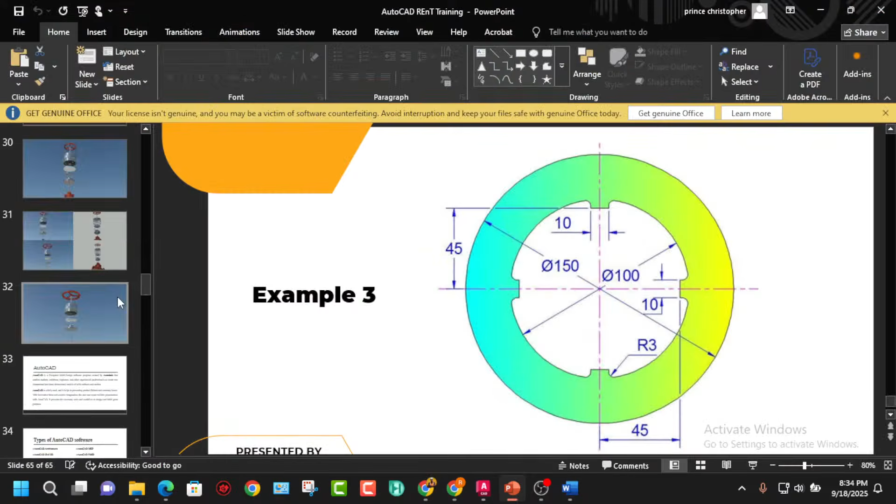Okay, I'll dive into AutoCAD and do some recap. I'm not going to start from the beginning. We talked about what AutoCAD is, and we looked at what AutoCAD is.

It's a computer aided design software designed by Autodesk that enables drafters, architects, engineers, and other experienced professionals to create two-dimensional and three-dimensional models. When you are working with 3D, it's called 3D modeling. When you are working with 2D, it's called drafting.

We looked at professions that use AutoCAD, and we also looked at different types or variations of AutoCAD software. We looked at career as a CAD designer, and all these are careers as a CAD designer. We talked about how architects can maximize the use of AutoCAD, as well as mechanical engineers and product designers.

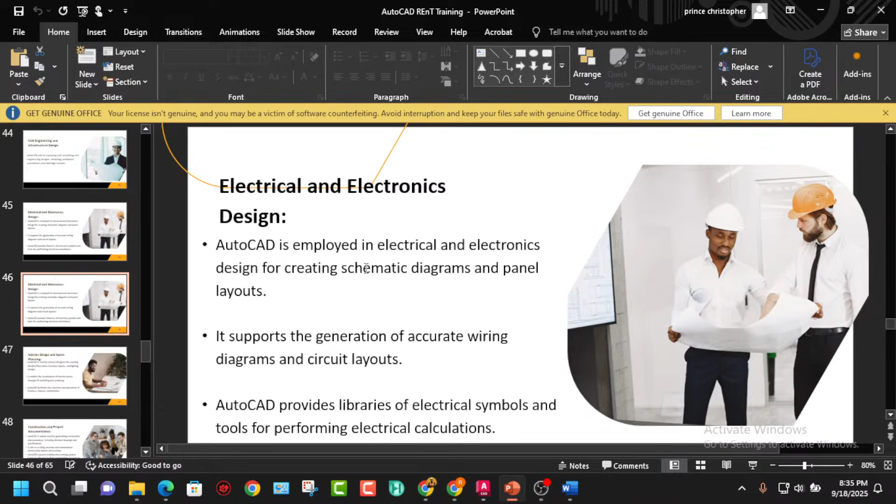We looked at civil engineers also, electrical and electronics engineers — they also use AutoCAD. We also have interior designers.

There was this brief introduction to the AutoCAD workspace, and we familiarized ourselves with the AutoCAD workspace, the ribbon, the user coordinate system, and the command line. We also have the view cube, the ribbons, and all of that.

In the first class, we looked at line, polyline, circle, rectangle, polygon, and arc. We didn't treat arc, and we haven't also treated hatch. During our first class, we looked at the major difference between the polyline tool and others.

We also looked at the circle tool, noting there are different ways of drawing a circle. You can either use radius or diameter. That means you click on the circle tool, specify the center point, and then specify either the radius or the diameter of the circle.

We looked at the rectangle tool also, how to create a freehand rectangle and also a rectangle with dimension. We looked at polygon, how to create an inscribed polygon and how to create a circumscribed polygon.

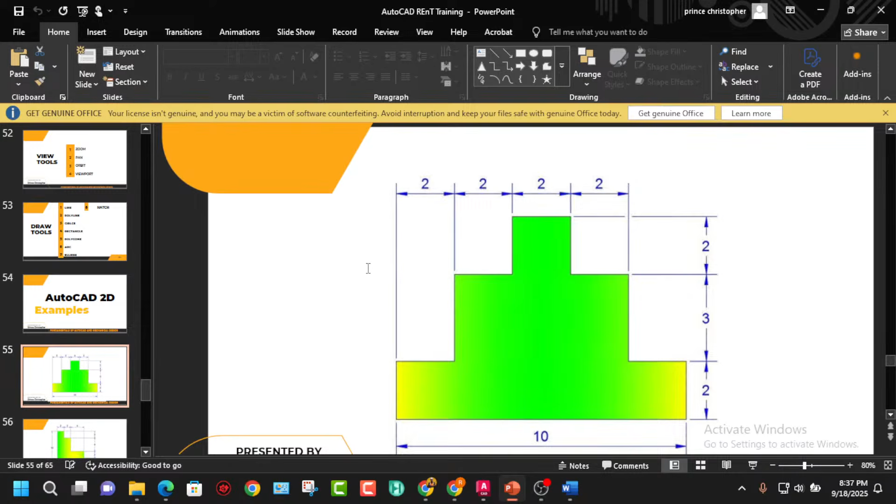Some of you here have used AutoCAD before, so this is not the first time, but I believe you all learned something from the previous class. We took an example — this was the first example we did, using the line tool and the basic procedures of carrying out a 2D drawing. These were examples or assignments that we were given.

Then we also did this using the coordinate system, which I'm going to do a little recap on before we move forward. Before I start, I would like to ask if anyone has any question from the previous class — if you have any question, please drop it in the chat box.

I'm going to take this tutorial again, or this exercise again, using AutoCAD, how to do coordinates, how to draw a 2D object using the coordinate system in AutoCAD.

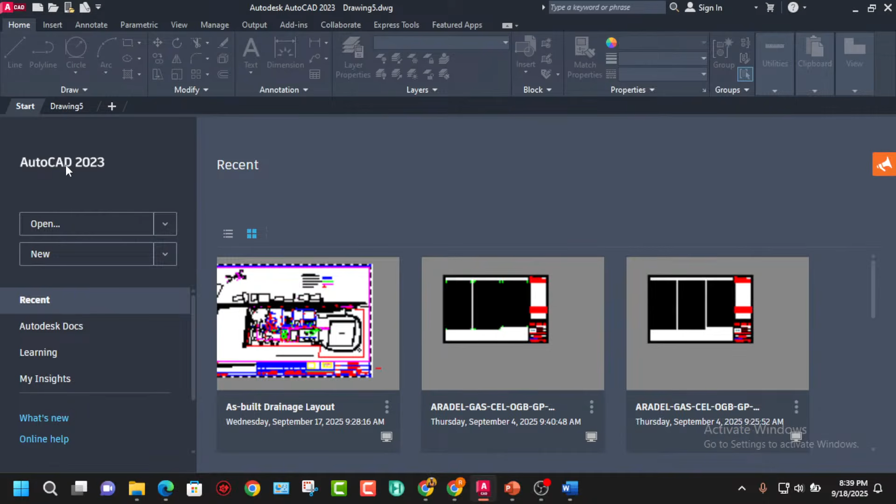Like I said in the first class, this is your AutoCAD working environment. This is the welcome screen or start screen. I'm using AutoCAD 2023. Below we have Open, to open a previous drawing, and New, to create a new file. I'm going to click on New.

AutoCAD basically works like a graph. You can plot points on your graph. Let's assume we have points like 5, 10. The 5 is your x-axis, the x-axis comes before your y. So if you have 5, 10, the x-axis is 5 and the y-axis is 10. Please do not misplace that, because if you do, you are going to get something different.

The first thing you need to do before you start doing any drawing in AutoCAD is to set your unit. The way to set your unit is to type UNITS on your command line and hit enter. This dialog box will pop up, and you click on precision. For now we are going to use a whole number, and I'm going to use millimeters. Click OK.

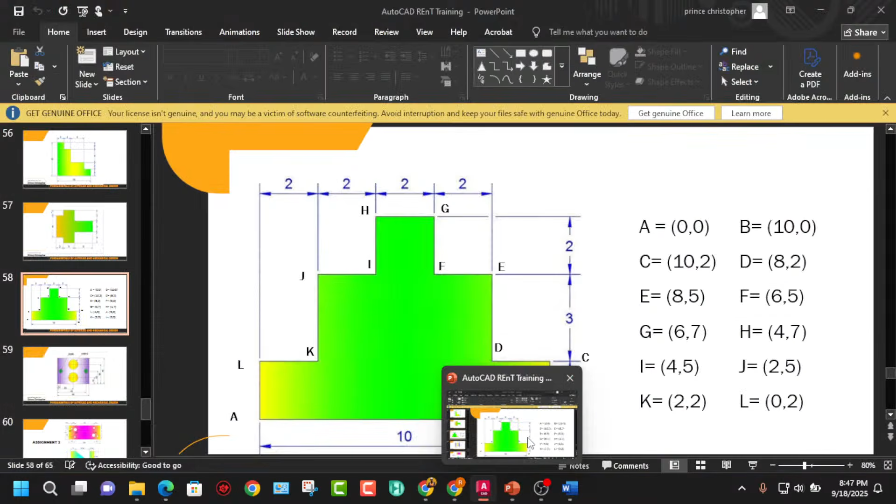Then we have 8,2. 8 is the x-axis, 8,2, while 2 is the y-axis. We have E, and so E is this point. We want to get this point now, and this is it, 8,5 rather.

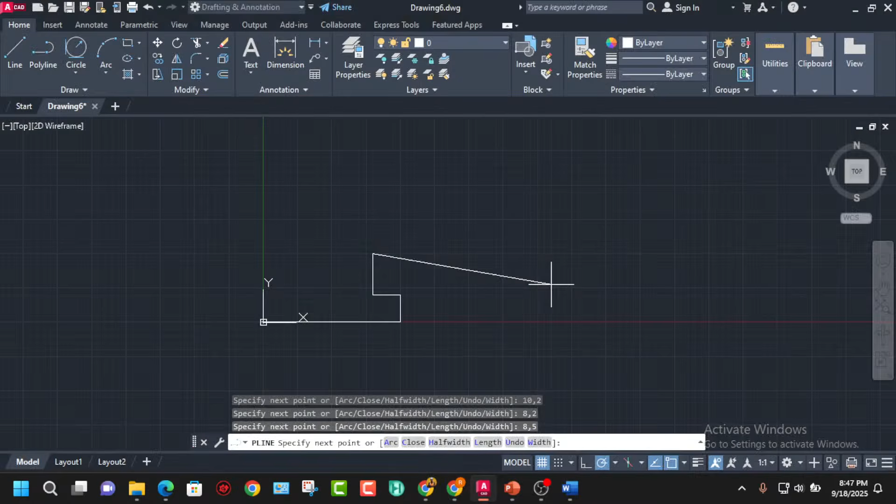It's 5, hit enter. The next point is F, which is 6,5. 6,5, hit enter.

The next point is G, which is 6,7. 6,7, hit enter. The next point is H, which is 4,7. 4,7. The next point is I, which is 4,5. 4,5.

The next point is J, which is 2,5. 2,5, hit enter. The next point is K, which is 2,2. K is 2,2, hit enter. And we have L, which is 0,2. L is 0,2, hit enter.

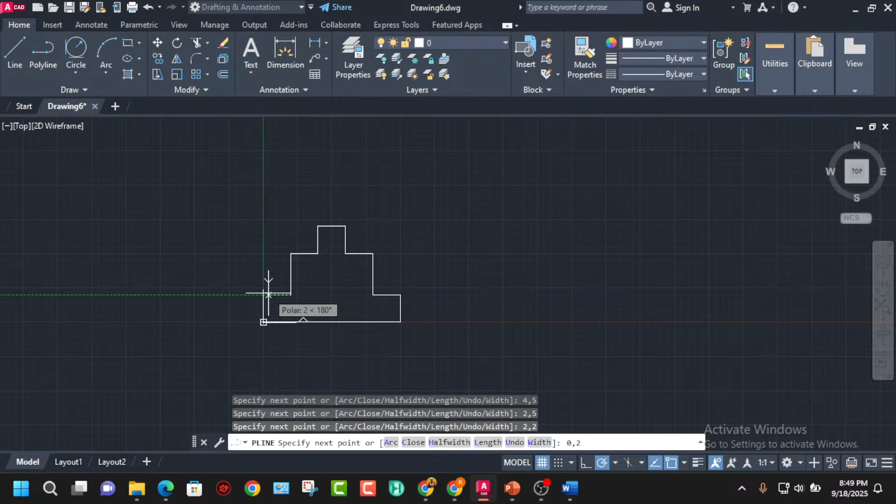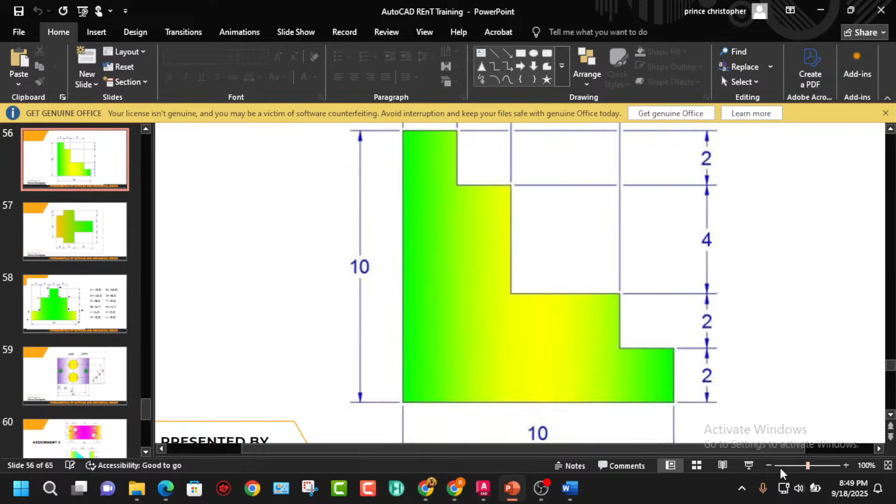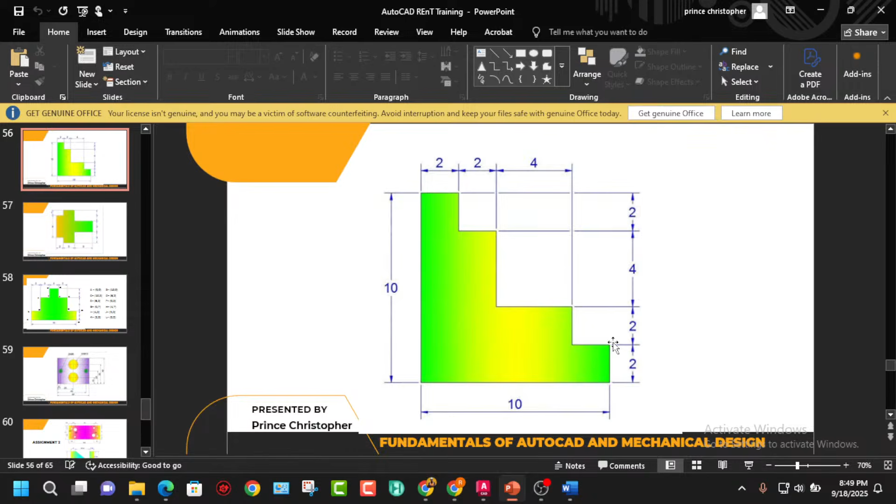And to finish it up, we'll use 0,0, which is the origin. Hit escape to leave that command. So you can see that we just did this example without leaving AutoCAD, or rather without clicking any specific line. You understand? So the same thing applies to this. You can do a lot of things using the same method, but sometimes you need to calculate this in order for you to get it.

So for this, I'm going to do this as the next example. I'm going to do this, and this is a square. This is 10 by 10. I will delete this.

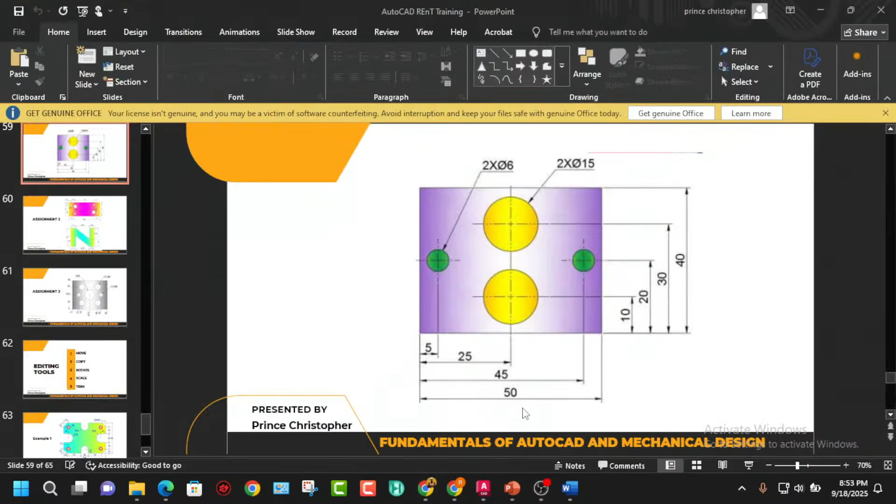Okay, that's perfect. So for this is what we are going to do next. The length here is 50, and for this is 40. I'll move over to AutoCAD and use my line this time. The previous time I used polyline. I'm going to use 0,0, hit enter.

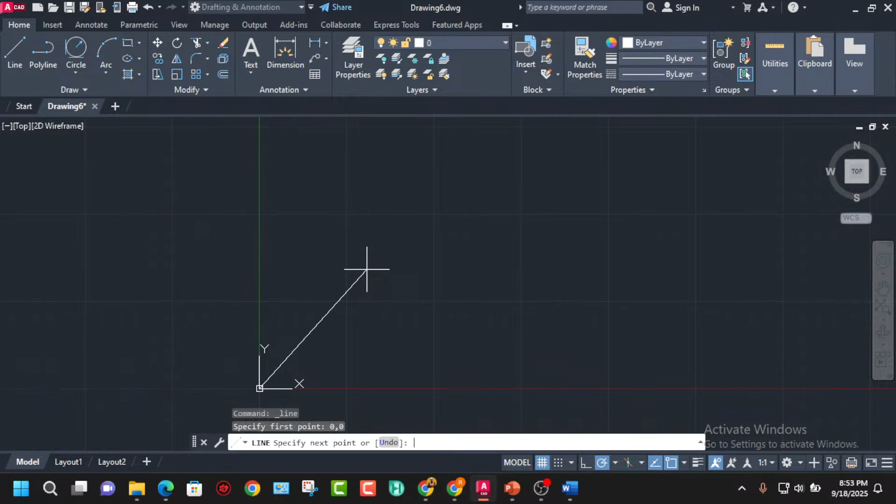Or I'm going to use the rectangle tool. Click on the rectangle tool, 0,0, hit enter. Click on dimensions and type 50. 50 is for the length, 40 is for the width. Okay, zoom out.

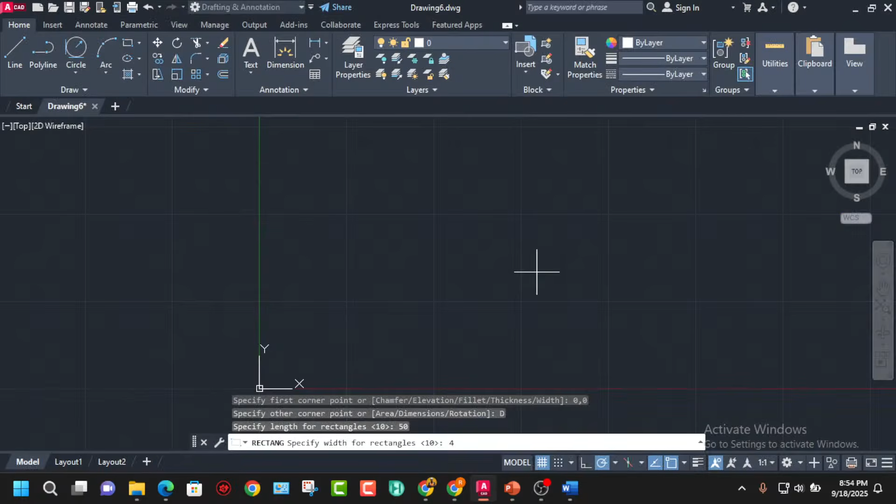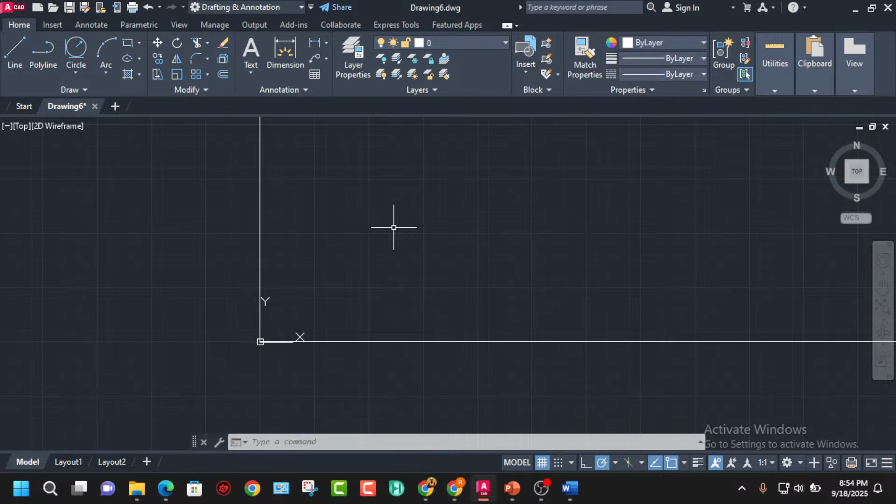Now you can see that when I drew this, my rectangle is big. Remember what I said when setting your limit? That was because the limit I used was 15, and how many times can you find 15 in this? So it means my object now is going to be very big, it's going to look big.

So I need to zoom out. The same thing if you drew this and your limit is maybe 1000 by 1000, putting a length is going to make it look very small, so you have to zoom inside a lot.

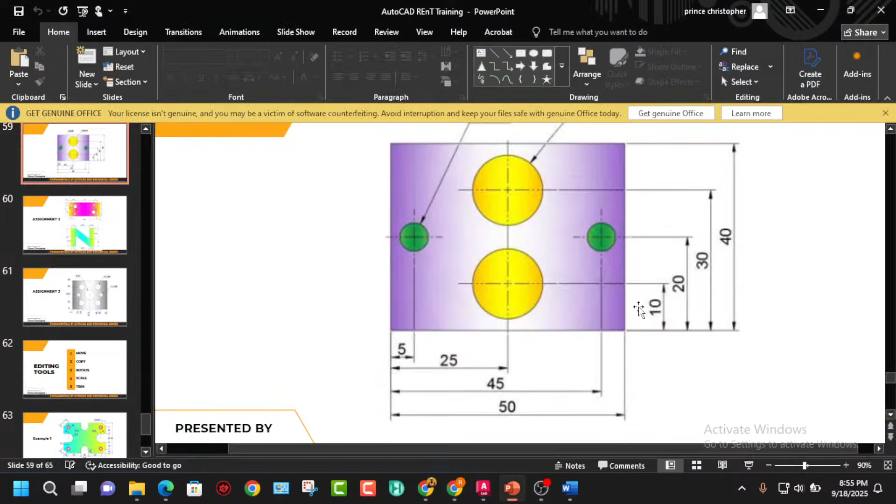Okay, I want to get this particular circle here. The length here is 5 and from here is 20. The coordinate I'm going to use is 5,20. For this, I'm going to click on the circle tool, radius. Okay, I need to confirm if it's okay, diameter. I'm going to use diameter, 5,20. Hit enter, and the diameter is 6.

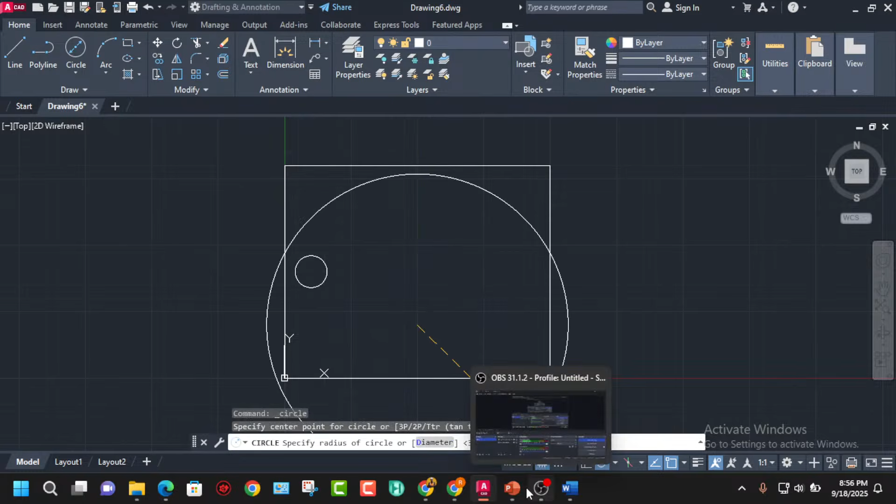I've gotten this. The next one I'm going to get is this big circle here. The length is 25 and here we have 10. So this is going to be 25,10. Click on the circle tool again. This will be 25,10. Hit enter, and the diameter of this is 15. Diameter is 15, not radius.

Circle 20,10. I think I'm correct. 25,10, 25,10. 25,10. 25,10. Okay, and specify the diameter, which is 15.

The same thing applies to this smaller one here. We have 45,20. 45,20. Click on circle. 45,20. You hit enter, and the diameter is 6. Diameter 6.

This top one here is 25, 30. That's the coordinates. We have 25, 30. Hit enter, and the diameter is 15.

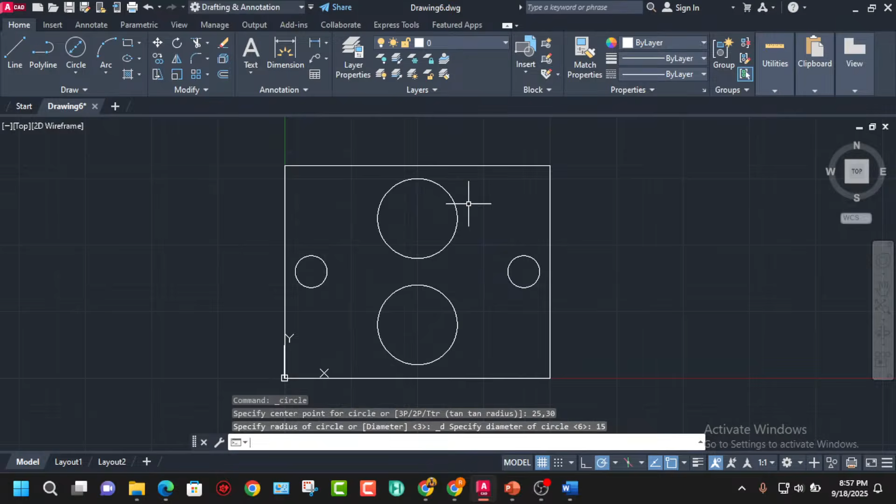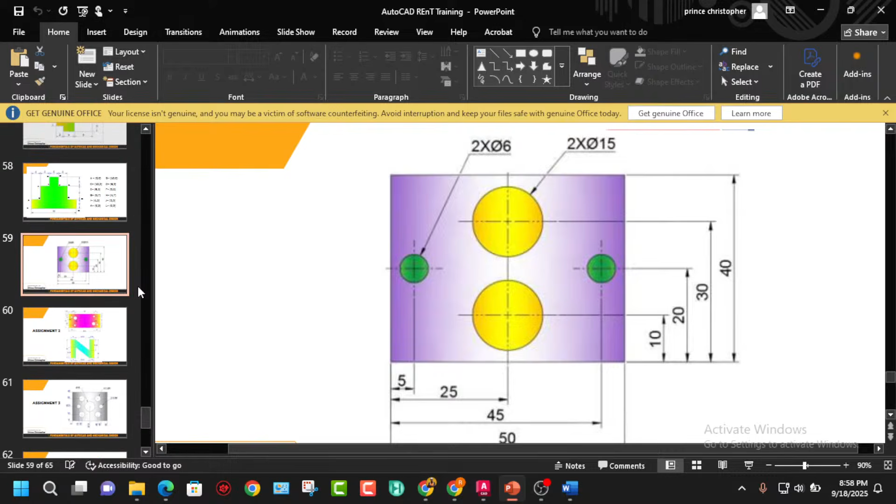So you found out that you can actually do a lot with your coordinate system. It doesn't really matter how complex the drawing is. You can still do this with the coordinate system, and you need to take this as a picture, snap it. This is going to be the assignment that will be submitted after this class.

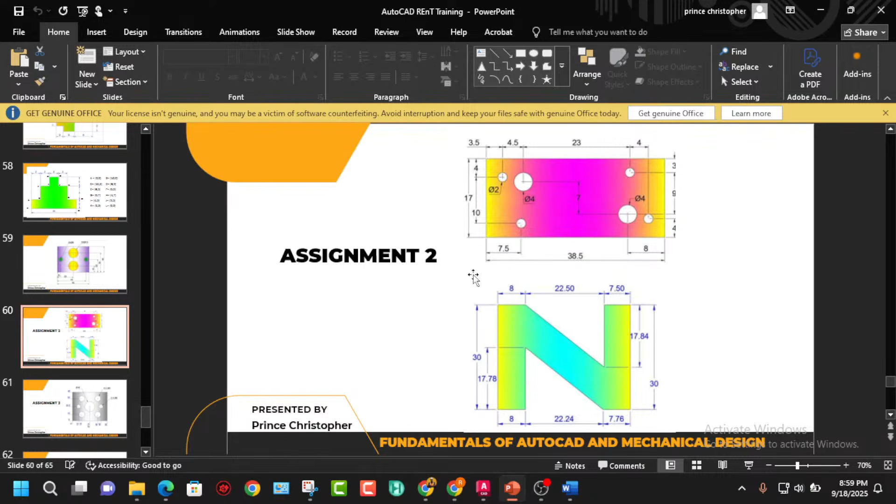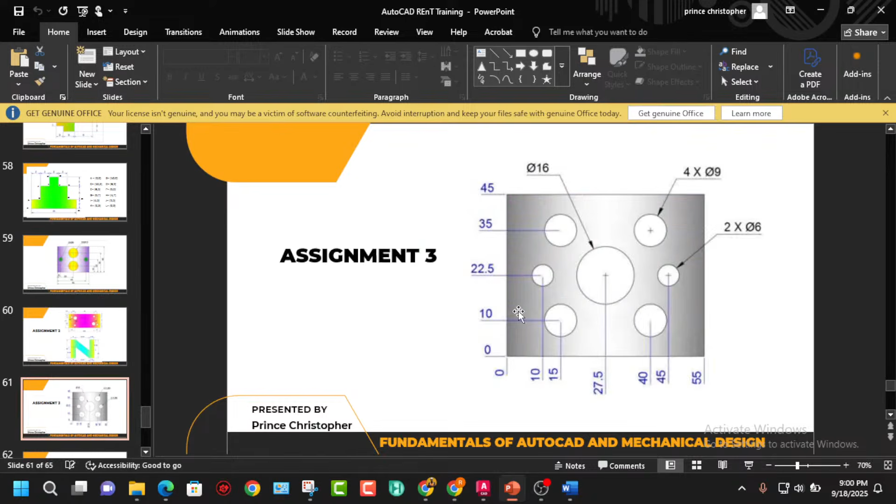And this is the next example we are going to do, as it has to do with using coordinates. For this, the highest here is 55, and we have 45 almost. This is 50, 40. So for this, we have, okay, this is supposed to be assignment 3, but we are going to use it as an example. So this is 55 and 45.

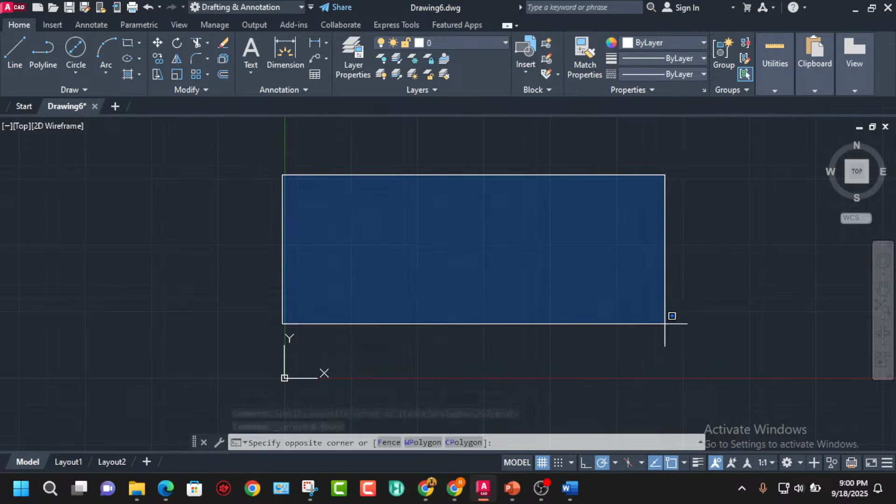Move over to my AutoCAD. I'm going to delete this. I explained the different type of selection tool. We have this, which is the marquee selection tool with blue, and this other one with green. Both of them perform different functions.

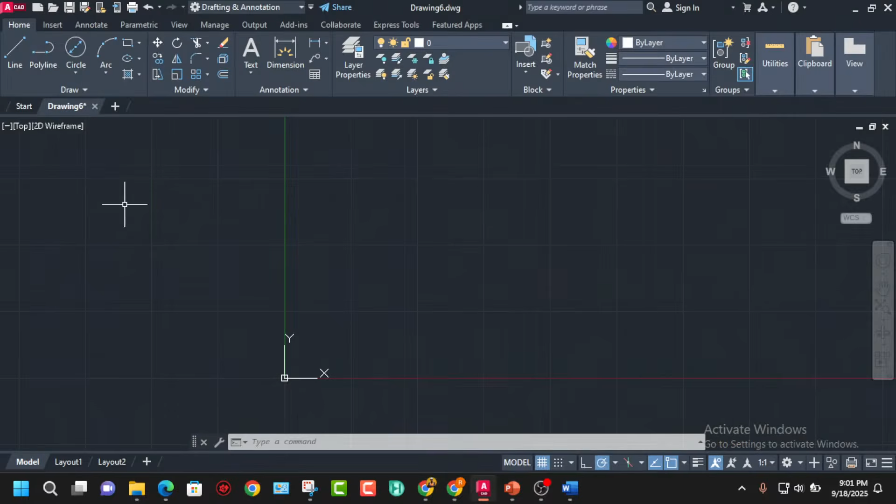Okay, let's move over to this. This is 55, 45. Move over to AutoCAD, click on the rectangle tool, 0, 0, 55, 45. Hit enter, click to select or to accept it.

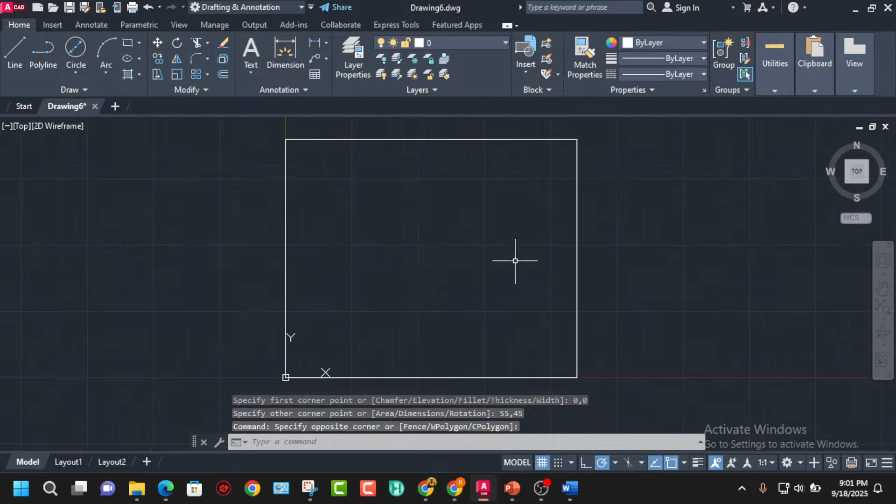And for this might look somehow strange. Oh, how can I do all this? It's very simple. If you track this circle here, we have 15 and we have 10.

Okay, I'm going to click on the circle tool. I don't know if this is given. Okay, this is given in diameter. The diameter is 9. The diameter for the big circle is 9. The small circle is 6.

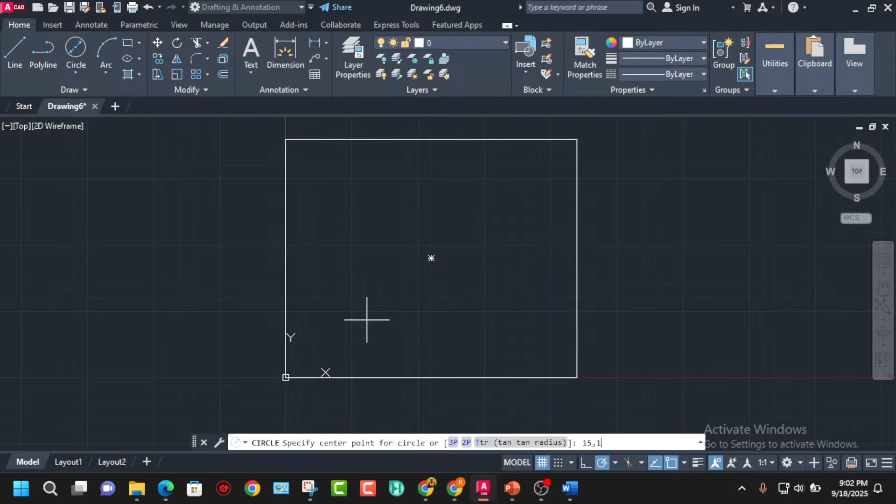(15,10). Okay, I'm going to type 15,10, and here we have diameter as 9. Enter. And we have this is 10, 22.5.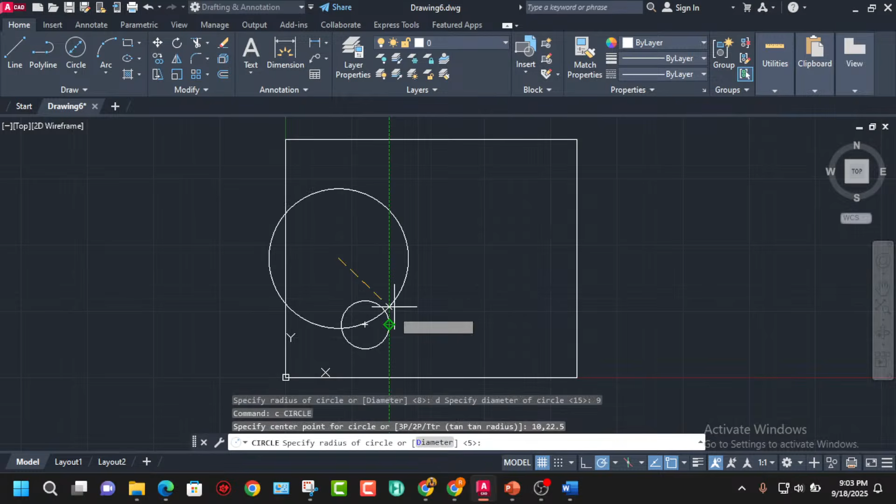Circle again. All I just did was to type C on my keyboard and hit enter, basically maximizing the command line for shortcuts. 10, 22.5. Hit enter. And is this a big circle or a small circle? This is a small circle, and the diameter is 6.

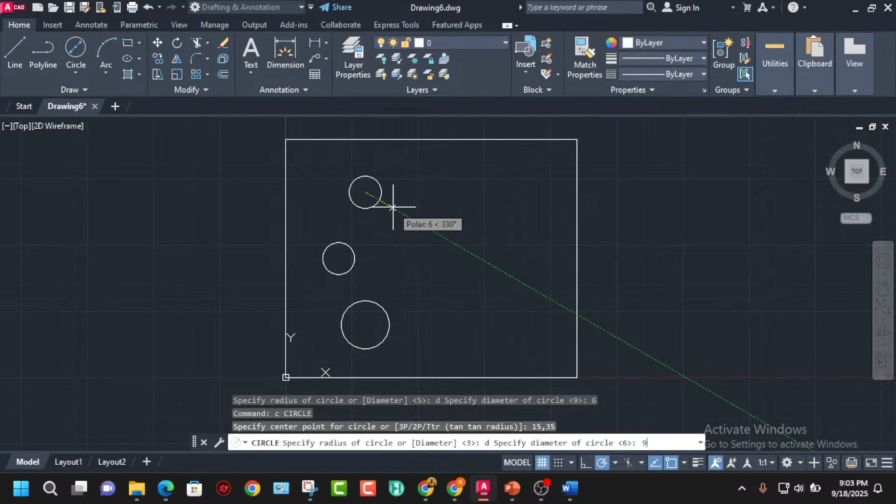So we have this is 15, 35. Circle, 15, 35. And the diameter is 9. I guess this is a big circle.

Okay, yes. And we have here, this is 40, 10. Circle 40, 10. And the diameter is 9.

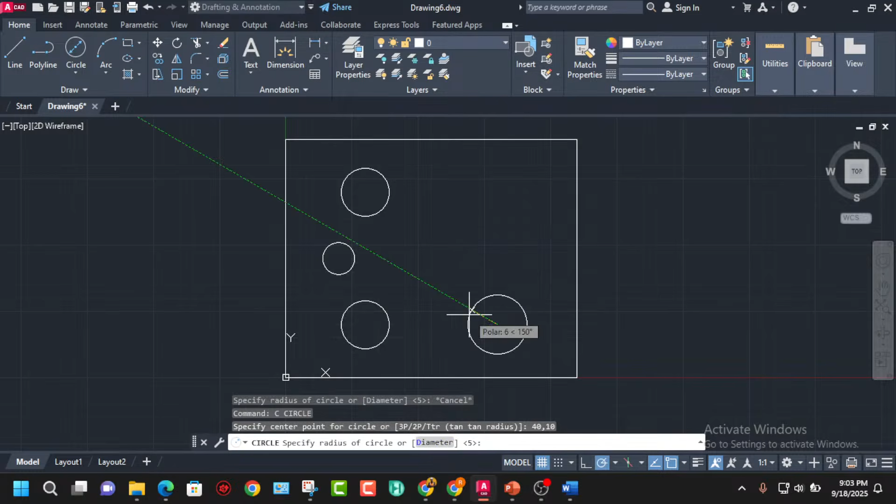For this is 45, 45. 45, comma 22.5. This is C 45 comma 22.5, and the diameter is 6. We have this is 40 comma 35, C 40 comma 35, and the diameter is 9.

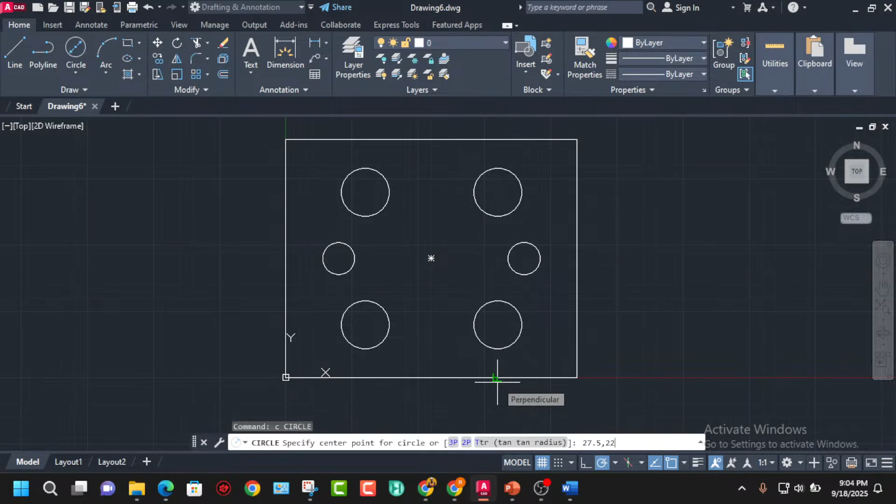Then we have the center, this center big circle, which is 27.5 comma 22.5, C 27.5 comma 22.5, and 16 is the diameter, D 16. You can see that no matter how difficult this object may look, it is doable. Something that can be done very, very easy.

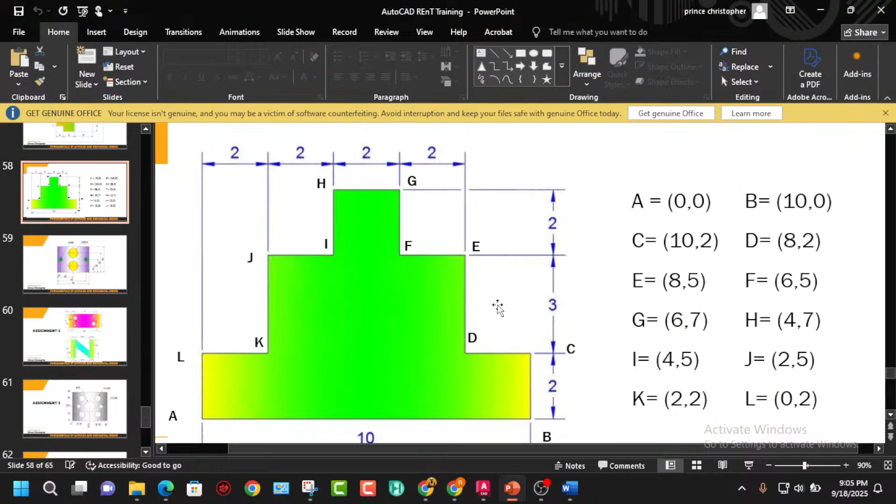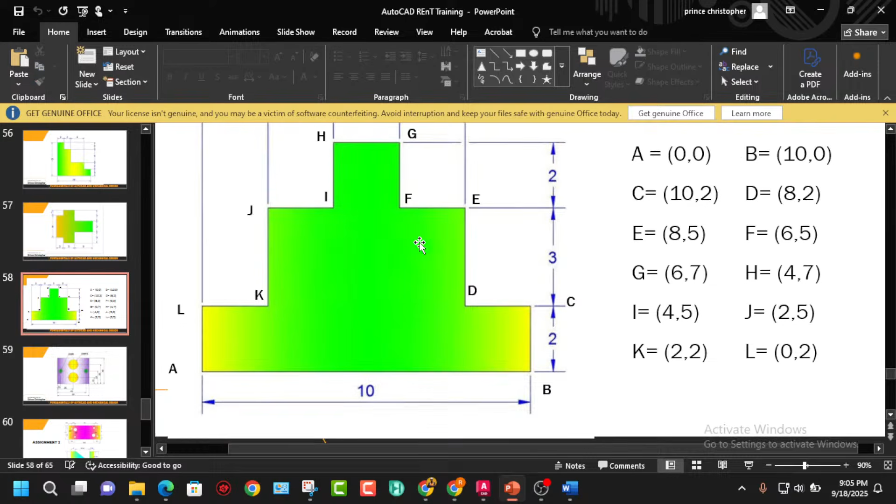One other tool we are supposed to look at is the hatch tool. How to set this color. Somebody in the WhatsApp group asks, okay, how can I add colors to this 2D object we just drew? Okay, we are going to look at that, but before I do that, I'm going to take questions.

I think I saw one question previously here. Okay, Solomon said, please, only my x-axis obeys the command. What's wrong? Okay, you need to reset your user coordinate system, and it happens a lot. You need to reset your user coordinate system. I'm going to drop the command for that. I think few persons have had that challenge.

I don't have the command upstairs right now, but I will drop the solution to that. Just a few things you need to type on your command line and hit enter, and it solves that problem. Okay, does anyone have any question?

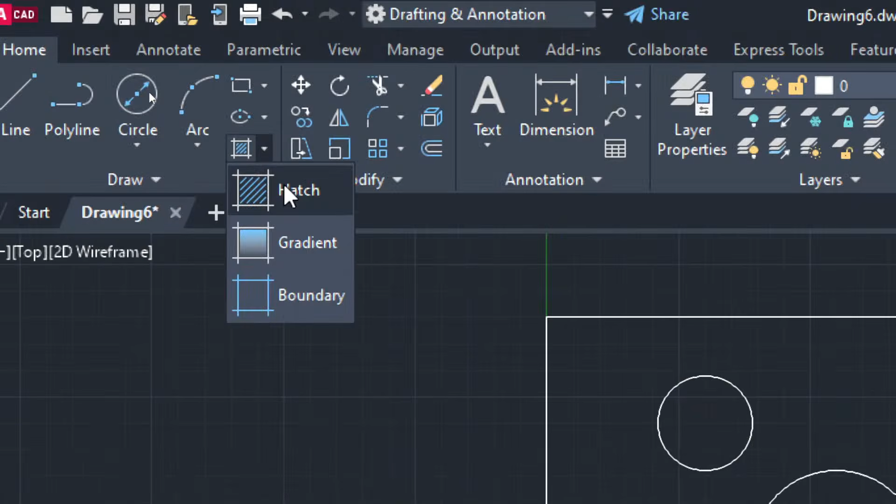I'm going to zoom in. Here we have different types of hatch - we have hatch and we have gradient. What we have as the example we are doing was done using the gradient. But it's still the same procedure in getting the hatch.

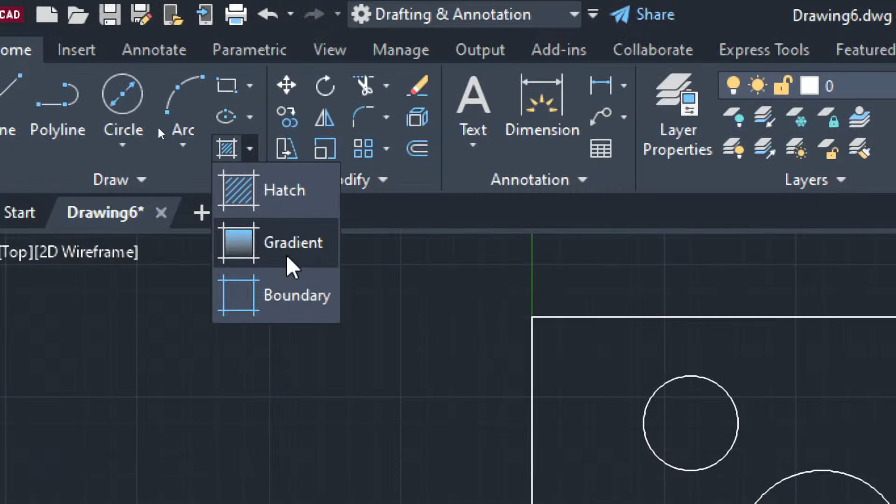You come down here, click on gradient. The moment you select your gradient, your ribbon is going to change. Just give it a little bit of time. Yeah, the ribbon is going to change, and come down to this point and click on gradient.

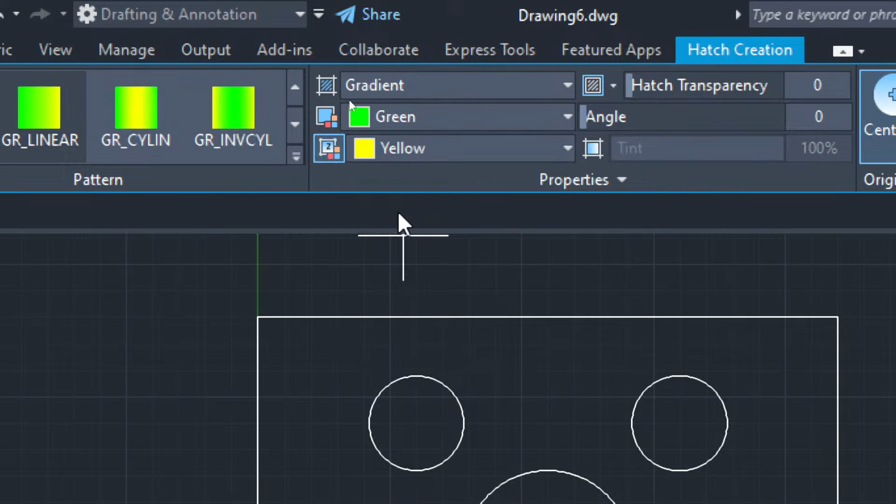Now these are the two colors you can pick. I'm going to select green, and I'm going to just leave it at yellow or another shade. What shade of yellow should I use? Should I use this shade? Okay, I'm just going to use this shade.

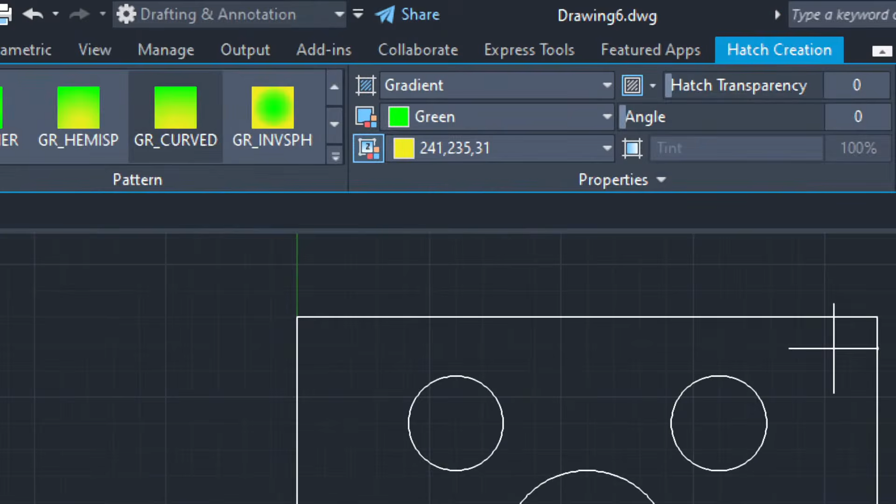Then you click this and you see a dropdown. I'm going to click on this. You can pick any of your preferred choice. After you have done that, you...

Come down here and select inside of the object you want to apply that gradient on. That's just what you need to do.

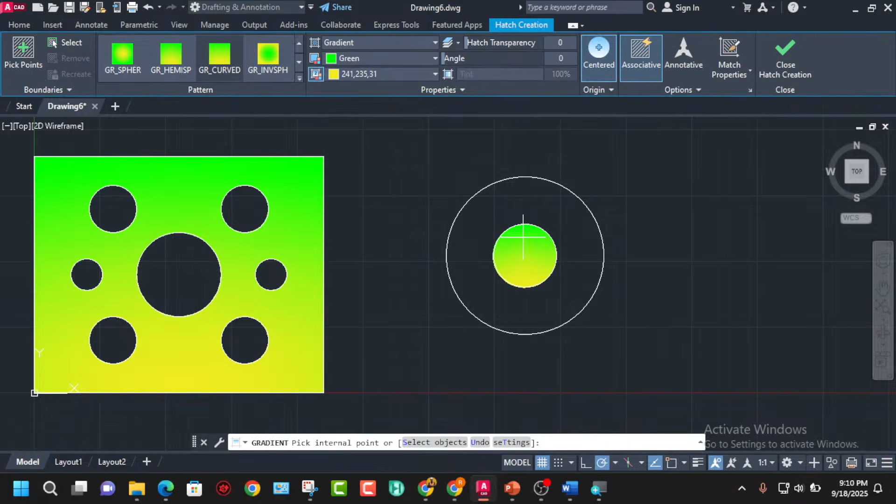As many times as you can, do that often. I'm going to draw something stylish like this, just something simple rather. Wherever you pick, you can see the preview. If I select inside this smaller circle, that's where it's going to apply. If I hover around this smaller one, that's where it's going to apply.

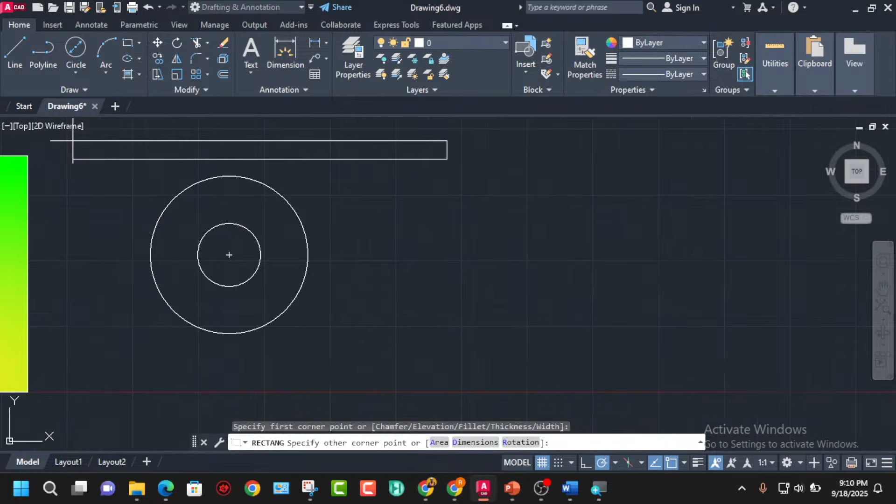Your gradient works in, or is being applied in, a closed area. I'm going to give an example of that. You can see this - you can't apply gradient on this because it's not closed.

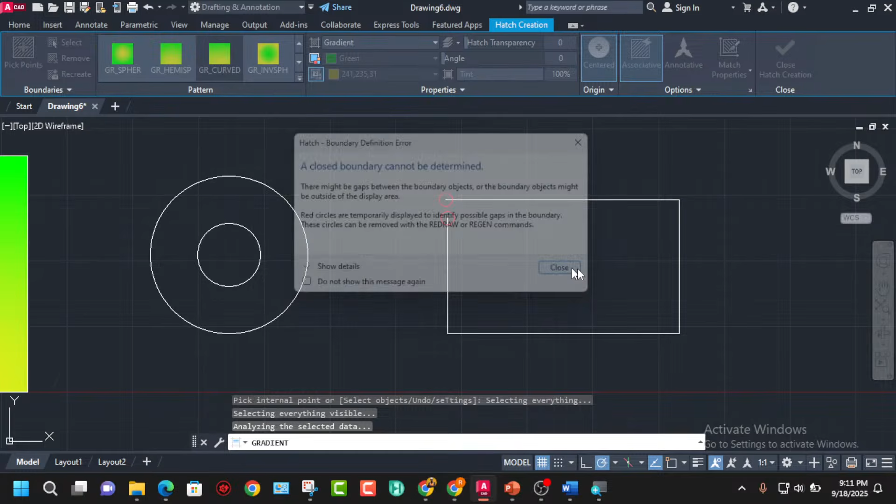AutoCAD will definitely give you an error. It says there might be a gap between the boundary object, or the boundary object might be outside the display area. You can see that there's this red circle showing that this place is supposed to be enclosed. So if you are doing anything somehow and your gradient is not applying, just know that there is an opening, there is a gap in your drawing.

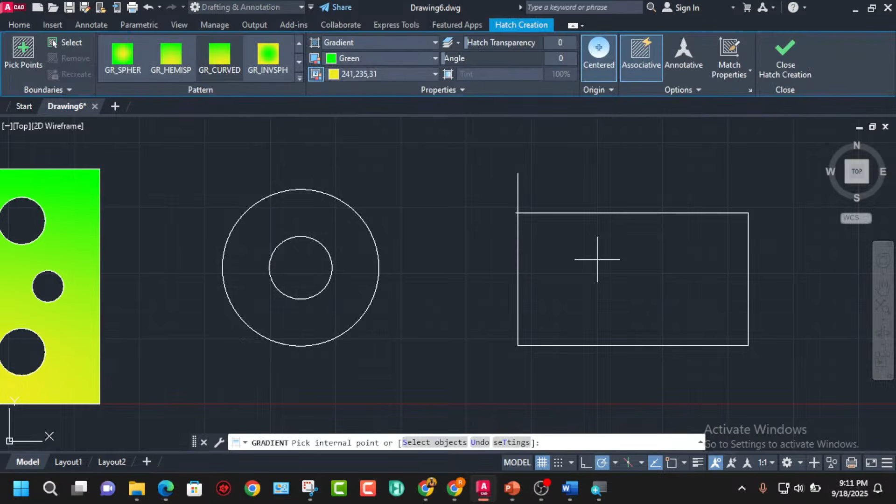Gradient also applies only when that object is totally enclosed. Like if I do it now, it applies because this is an enclosed system or a boundary area.

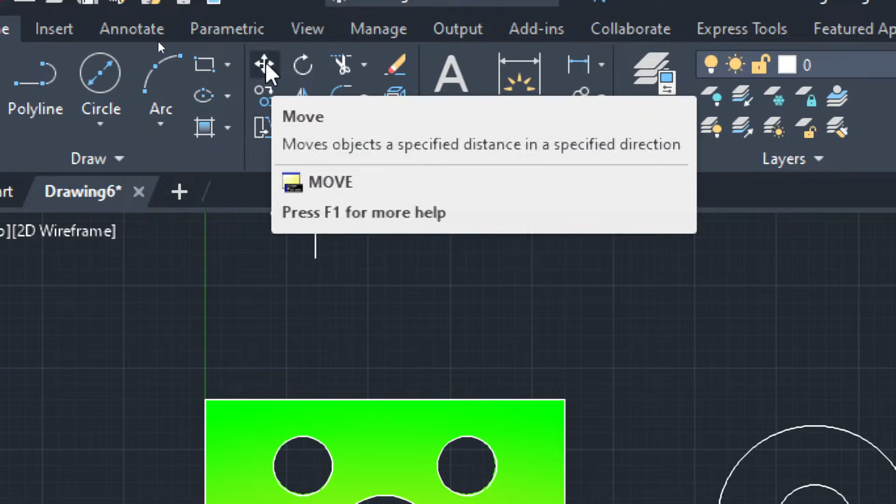Sometimes they are being called editing tools. So the first tool we have here is the move tool. The next tool we have is the rotate tool. The next tool we have is the trim tool. We also have the erase tool, used in erasing or removing objects.

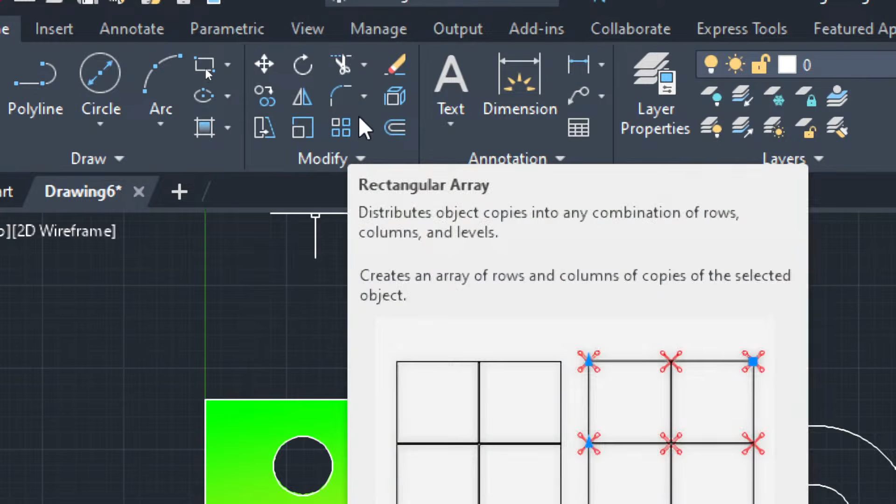We have the copy tool. We have the mirror tool. We have the stretch tool. We have the scale tool. We have the array tool. We have fillet or chamfer. We have the explode tool. We have the offset tool. And there are lots of editing tools here.

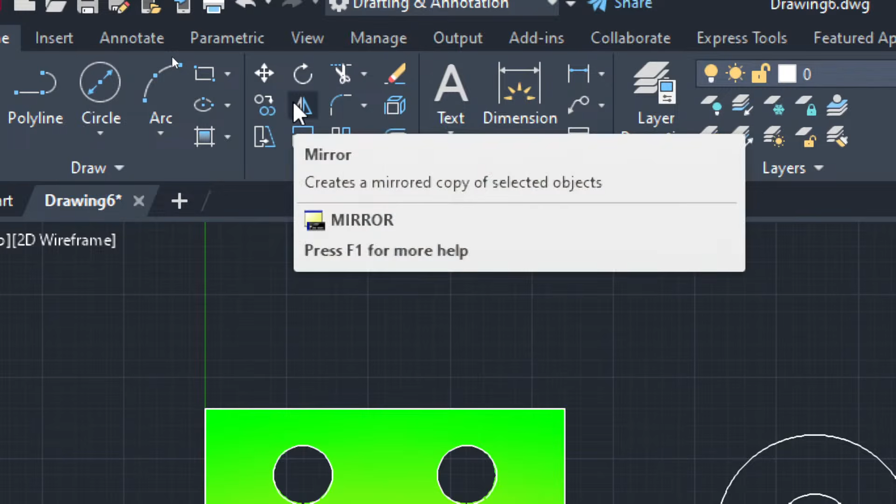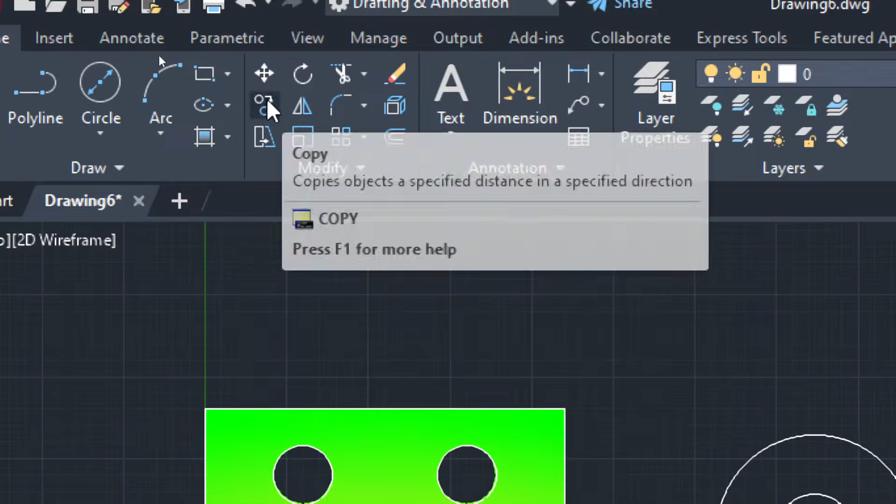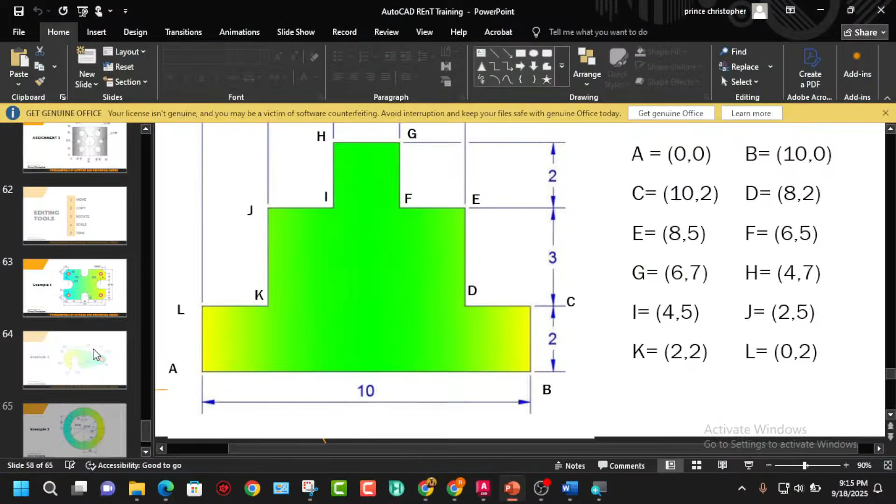But for this training, we are going to focus on the move tool, rotate, trim, copy, scale, and erase also. So these are the 5 tools we are going to be using in our upcoming class.

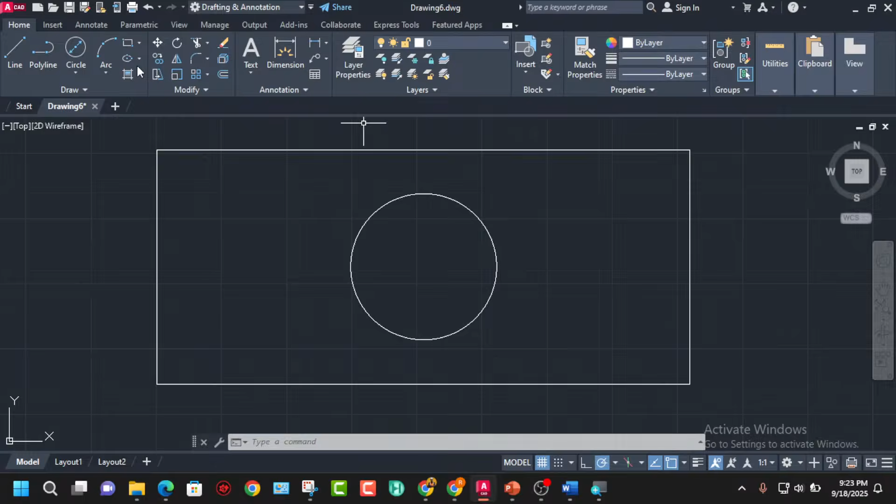Okay, so this is what we just drew. I'm assuming that, and I want to add color, like what most of you usually say, but what it's called is gradient. I'll come down to it, I'm going to zoom inside a little bit. So come here, you see gradient.

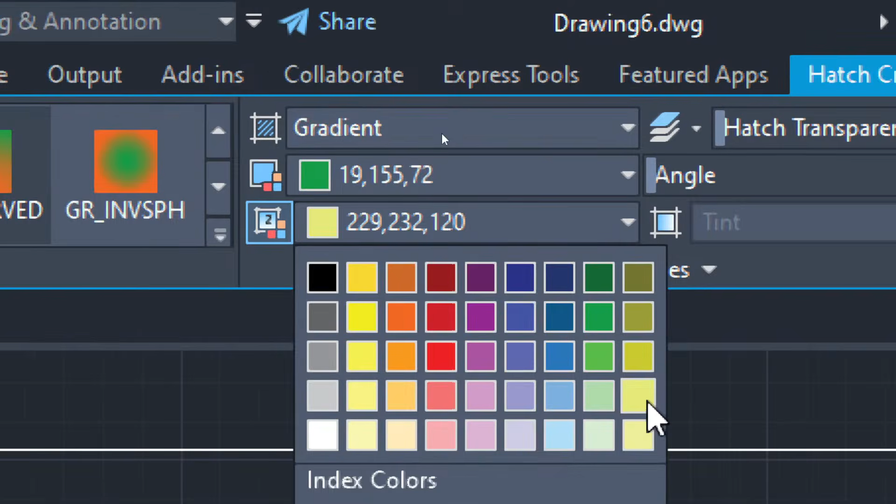I'll click on gradient and come down to this property panel. Select your desired color, your preferred color. I'm going to select this and select this also, those two colors. It looks like someone is fighting a war.

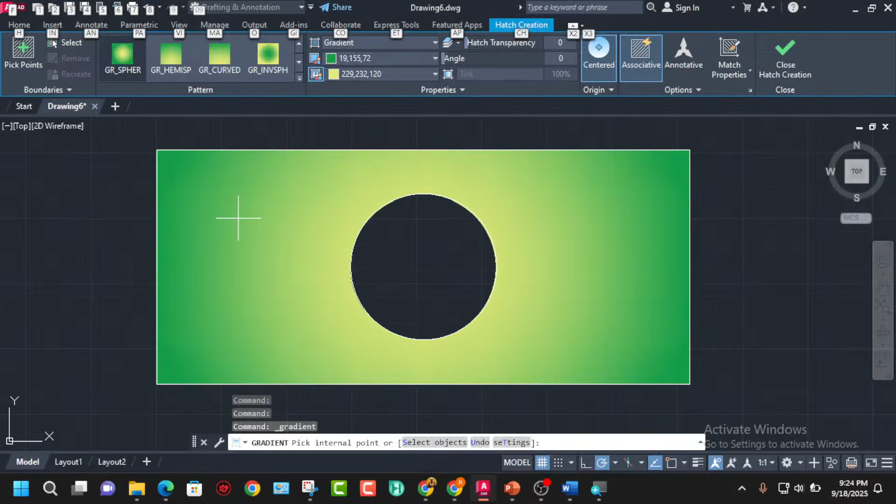Okay, then you select your preferred pattern. I'm going to select this pattern or this pattern, and select the object you want to apply that gradient on.

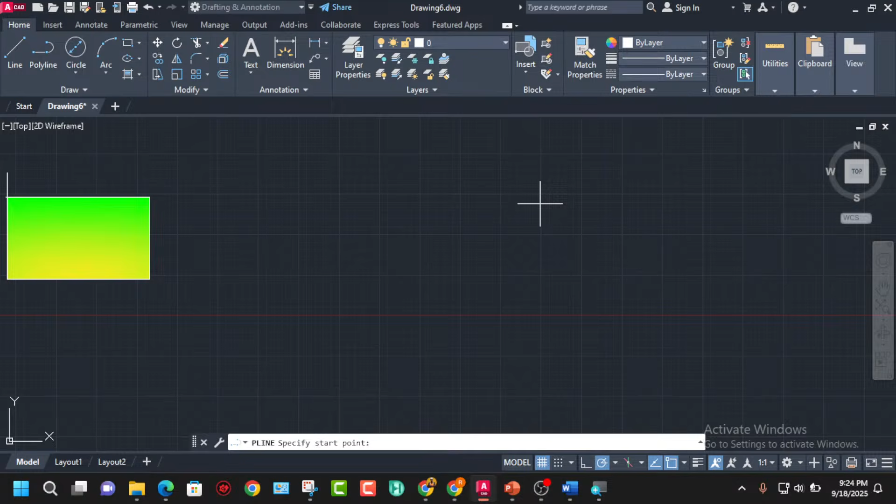And like I explained earlier, you can apply gradient only on a closed boundary. If you do something like this, let's assume something like this, this is not closed.

And you want to apply a gradient here, I'll right click, come to recent, click on gradient, and click inside of this. I will definitely get a warning or an error. It says a closed boundary cannot be determined. It means this can only be applied in a closed boundary, like a circle, a closed system.

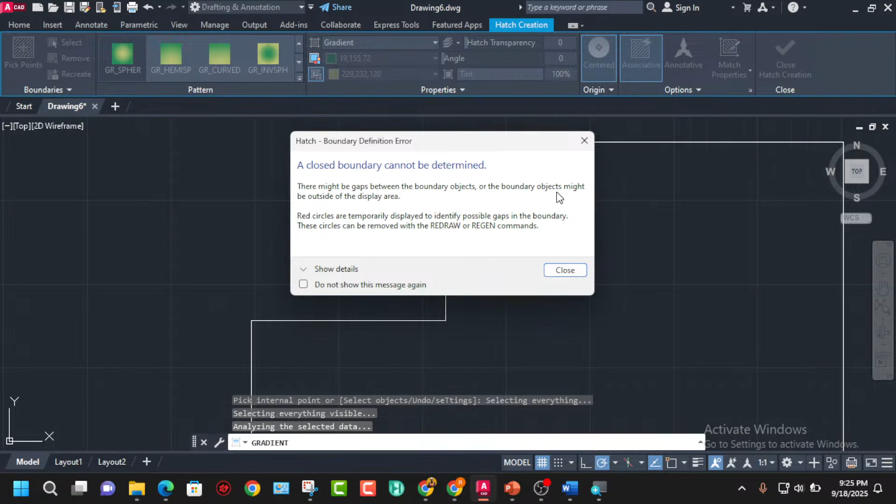There might be gaps between the boundary objects, or the boundary objects might be outside of the display area. So basically you can also see here that we have two red circles indicating that, yeah, we have an opening here.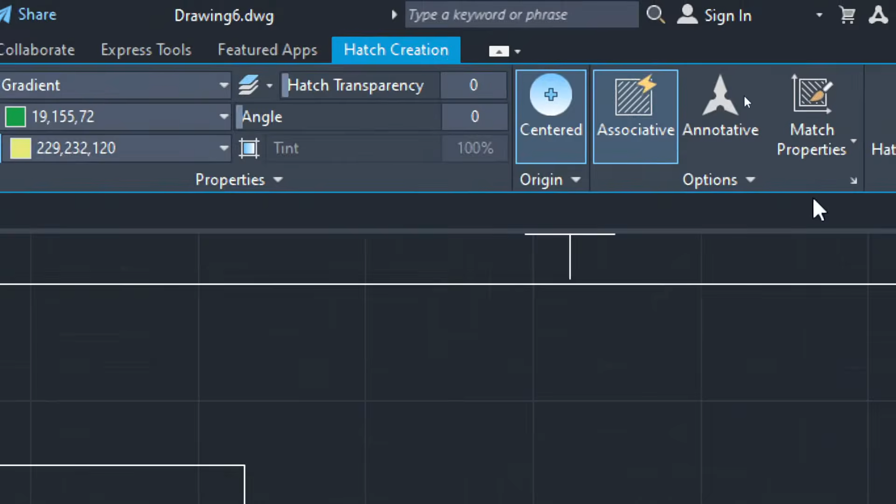So for us to solve this, what we need to do is to come here, click this, click close, then fix this first. Select this and move it upwards a bit, and then after we have done that successfully, we can come down to gradient again and add our gradient.

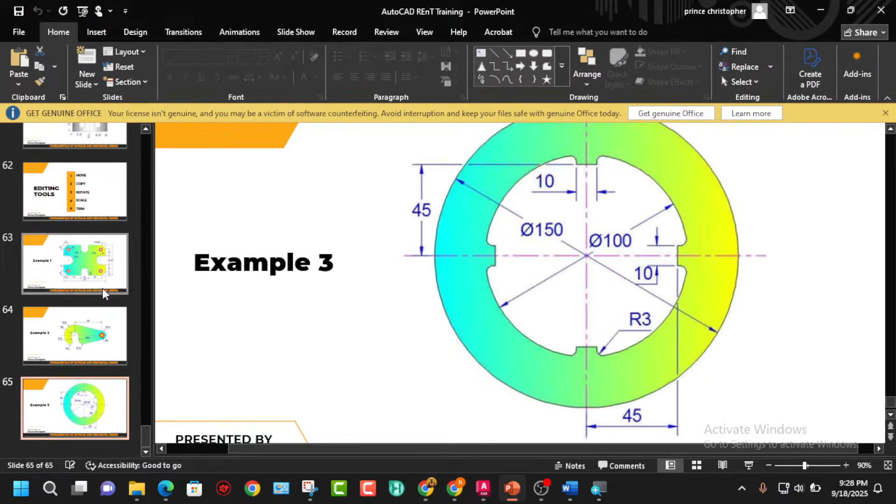Note that these examples we are doing are some of the examples we are going to be doing in our next class, something more concrete and something a little bit tougher. That's what we are going to be doing in our next class.

Yeah, then we will look at move, copy, rotate, scale, and trim. So for this we might do the 3 examples, or we might do 2 out of the 3 examples.

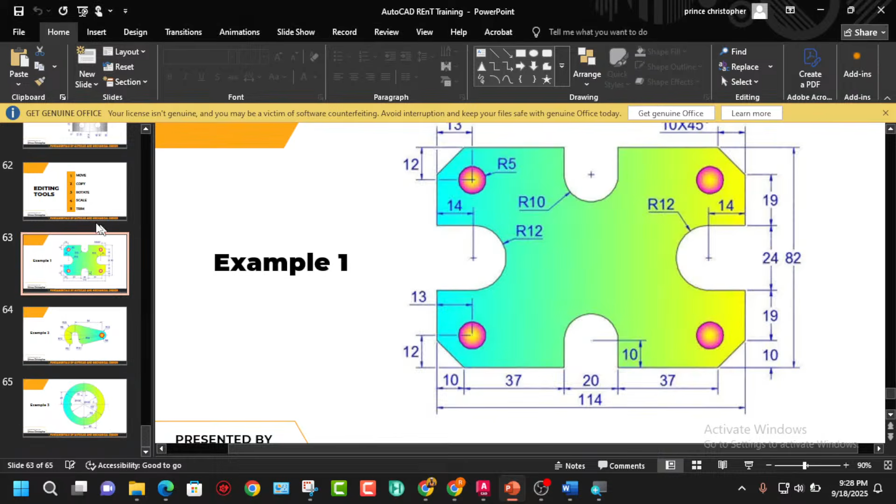And note that these stuffs we just did, there are easier ways of doing them. Maybe there are easier ways of doing them, but for this class I'm using these examples to explain a few things. We can use other tools to make this drawing faster and easier, but for this class we are taking this route.

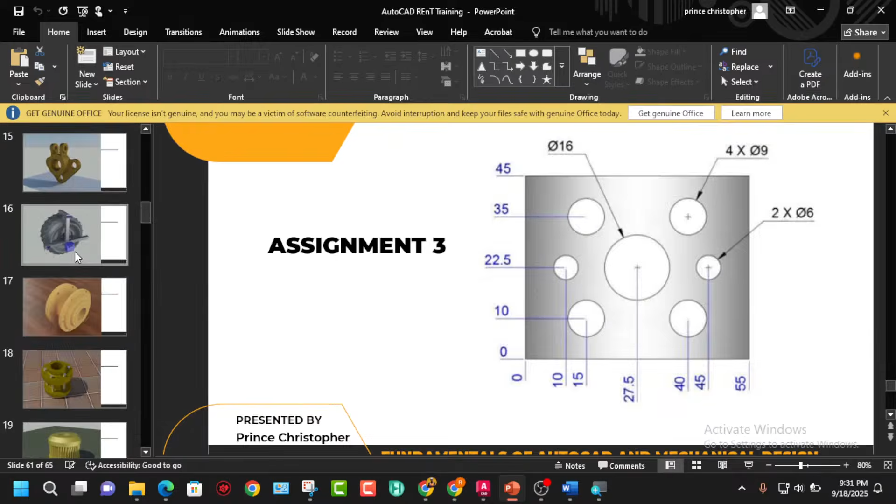After this free session, there's going to be an advanced class where we are going to take time to go into some of this. I'm going to give an example. So in our advanced class, these are some of the things we are going to be looking at.

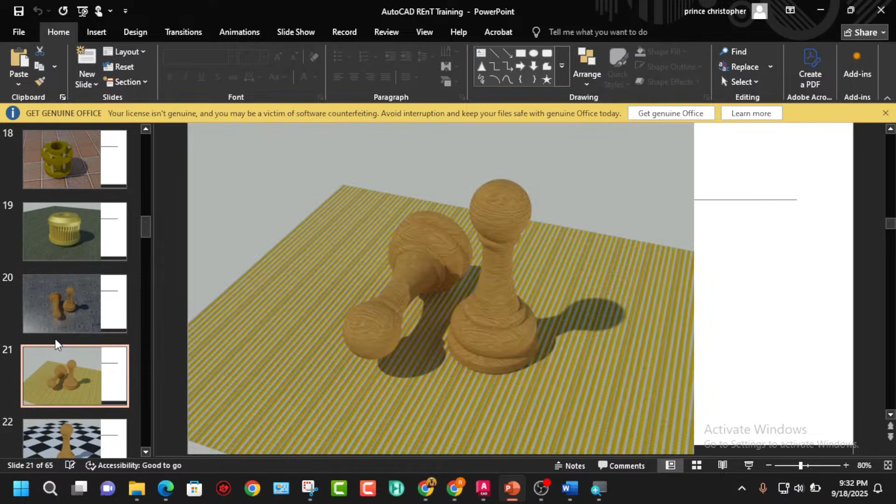This was done in AutoCAD. This was also done in AutoCAD. This was done in AutoCAD. All this, we did not use an external software - they were done using AutoCAD software. And in our advanced class, we are going to take our time to show you how you can do this.

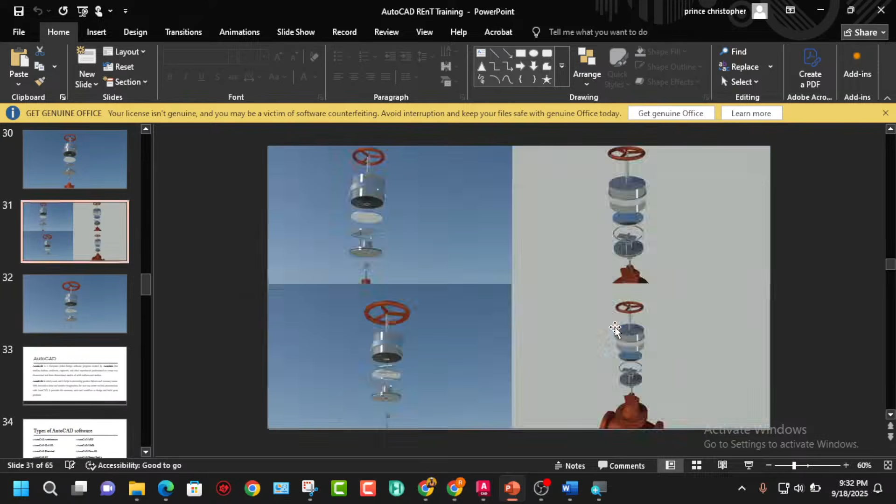For those in civil engineering, you can use AutoCAD for your structural detailing, and mechanical engineering also. These are stuffs you can do. Everything you are seeing in this slide was modeled in AutoCAD - the materials and all that. AutoCAD is very, very powerful, but we can't take everything in this free class.

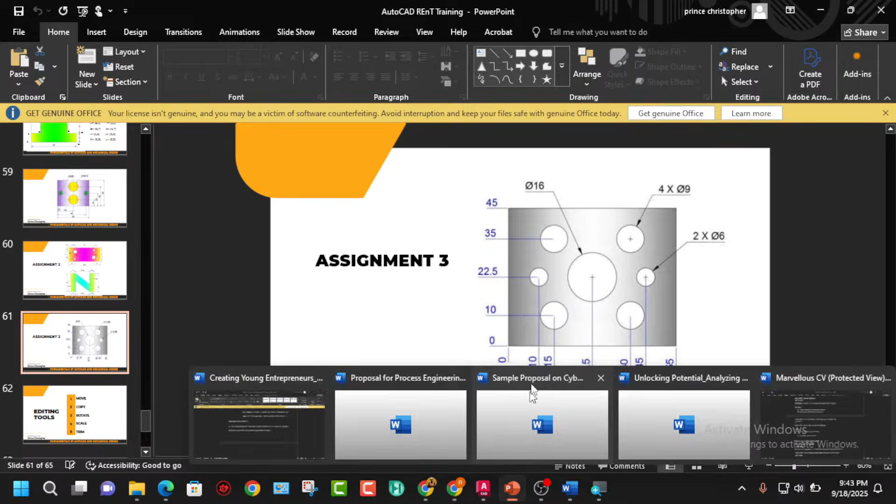You don't need to show the distance and dimension. Gradient and hatch is used to specify details in your drawing. So it depends, for instance this drawing that was given to us, it was done using gradient, so if it's given to you as an assignment, you need to also do it using gradient. It's not compulsory you add a gradient. And hatch, for instance if you are doing an architectural drawing, or even mechanical, and you are showing a section, wherever your slice passes through, you need to section it. You need to hatch that part, showing that yes, this place was cut through. So in engineering, you use hatch most of the time to show a section part of an object.